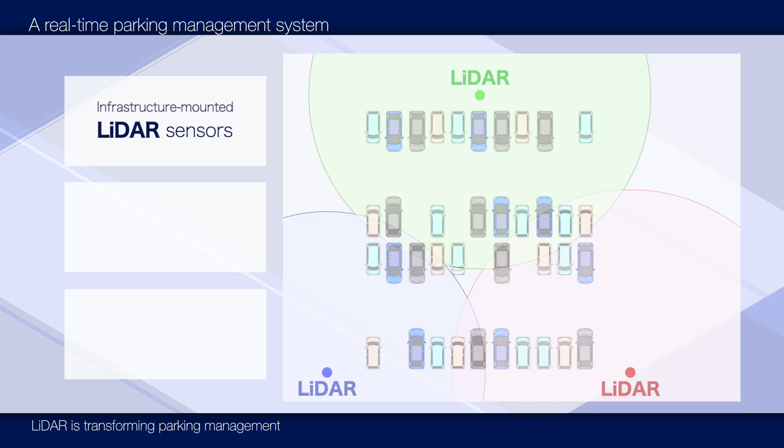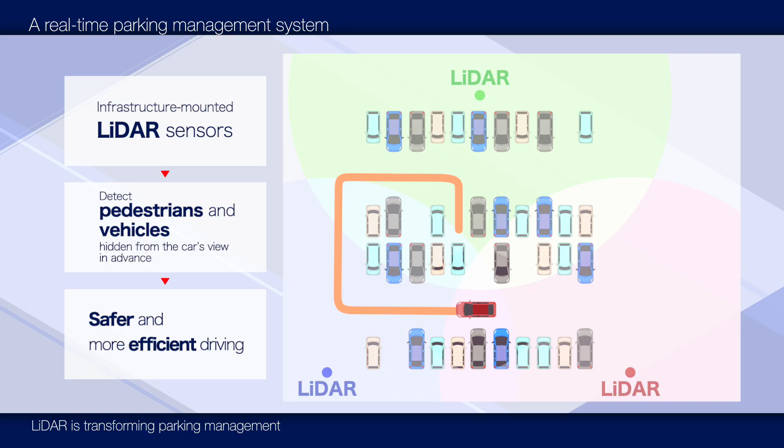In addition, we are also exploring applications for automated driving in parking lots, commonly referred to as automated valet parking. By using LiDAR sensors installed in the infrastructure, it becomes possible to detect the movements of pedestrians and vehicles, even in areas that are not visible from the vehicle itself, enabling safer and more efficient driving.

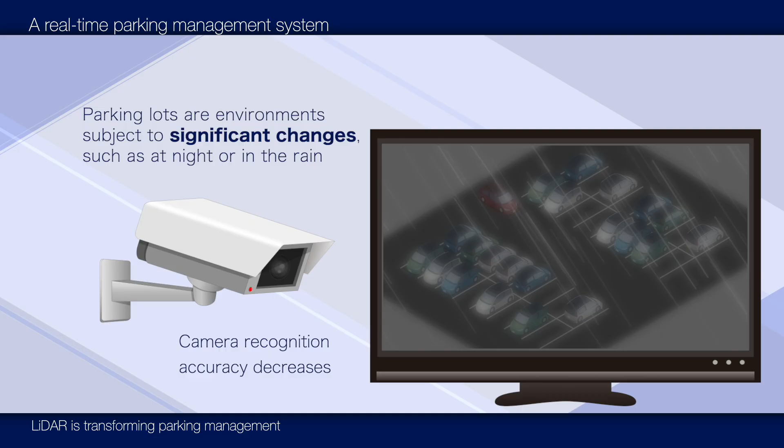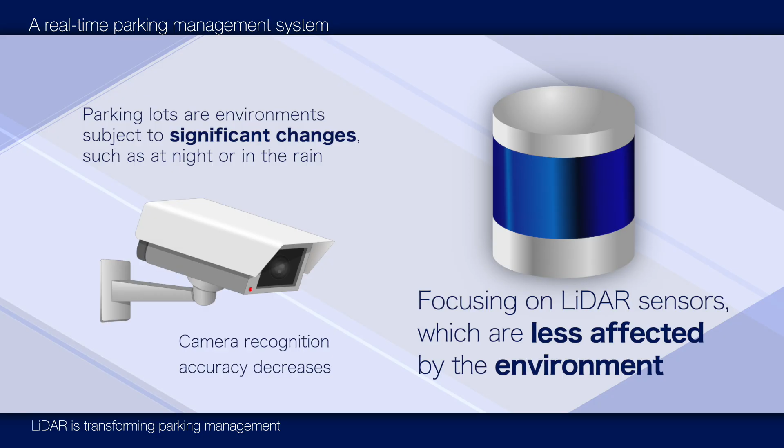Parking lots are environments that are subject to significant changes, such as nighttime conditions and rainy weather. When cameras are used to estimate parking space occupancy, recognition accuracy may degrade under such conditions. For this reason, we focused on LiDAR sensors, which are less affected by environmental changes.

LiDAR emits laser beams and determines the position of surrounding objects based on the reflected light. As a result, stable recognition performance can be maintained even at night.

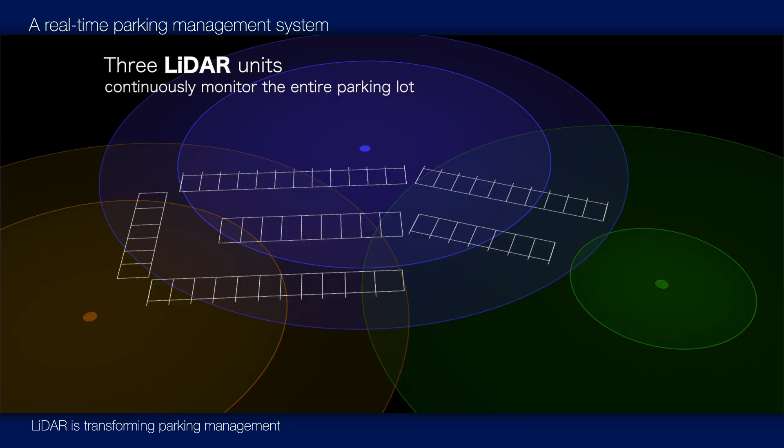At the public facility Grupo Fujito in Kasugai City, 3 LiDAR sensors have been installed to continuously monitor the entire parking lot. The data from these 3 sensors are integrated and utilized for services and experimental evaluations.

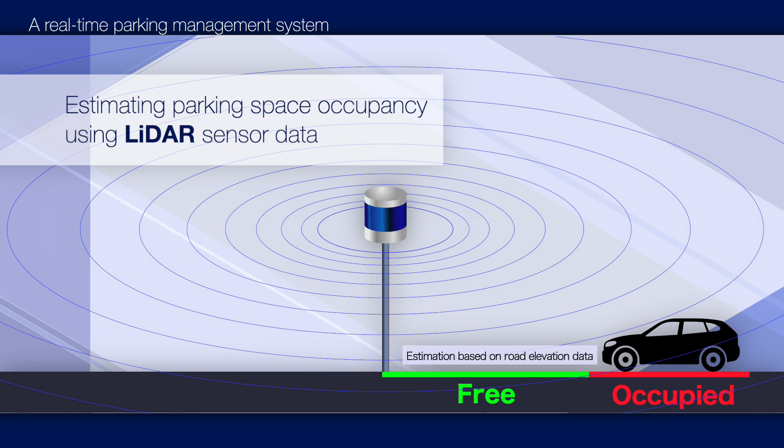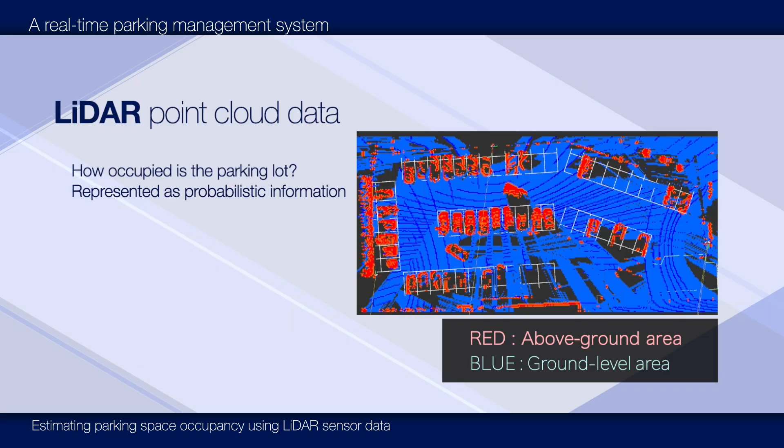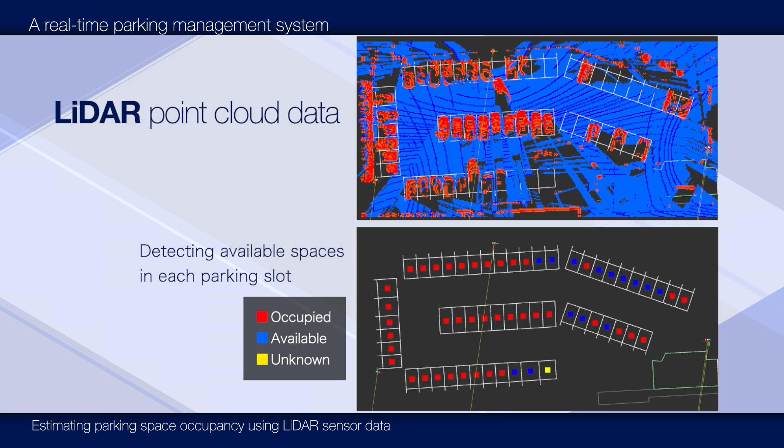First, we introduce a method for estimating the state of parking spaces using LiDAR sensor data. Based on point cloud data obtained from LiDAR, the degree of occupancy within each area of the parking lot is represented as probabilistic information. By combining this probabilistic spatial information with a high-definition map of the parking lot, it is determined whether there is sufficient free space for a vehicle to park. Each parking space is then estimated to be either available or occupied.

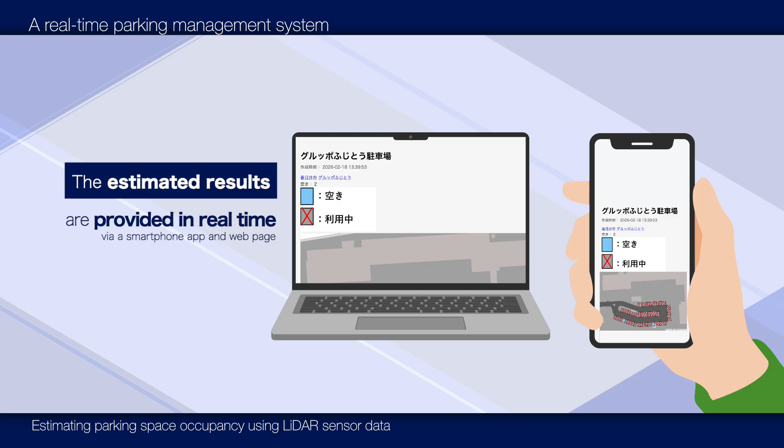The estimation results are provided to users in real time via a smartphone application and a web page. This allows facility users to check parking availability in advance, thereby improving overall convenience.

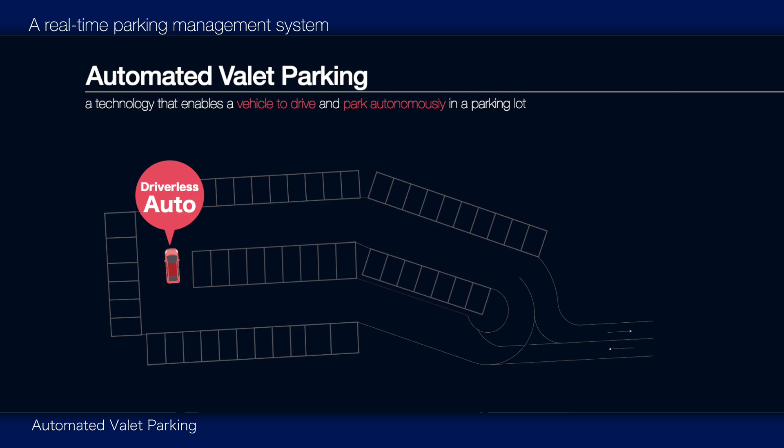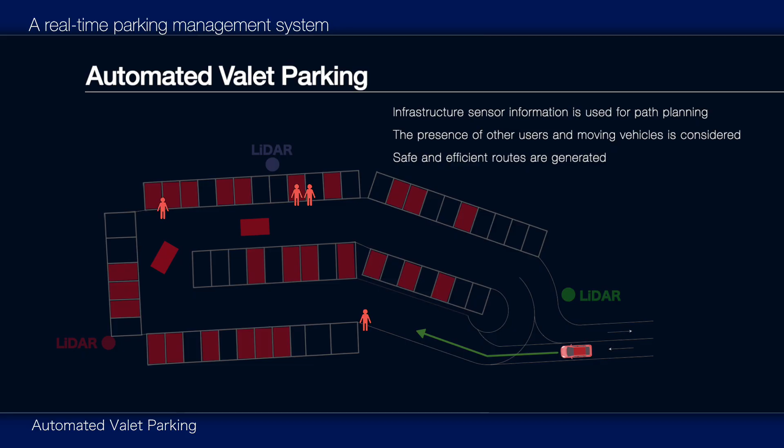Next, we introduce an application of the same LiDAR sensor data to automated valet parking. Automated valet parking is a technology in which a vehicle autonomously drives and parks within a parking lot on behalf of the user. By incorporating infrastructure-based sensor information into the path planning process, safe and efficient driving paths can be generated while taking into account the presence of other users and moving vehicles.

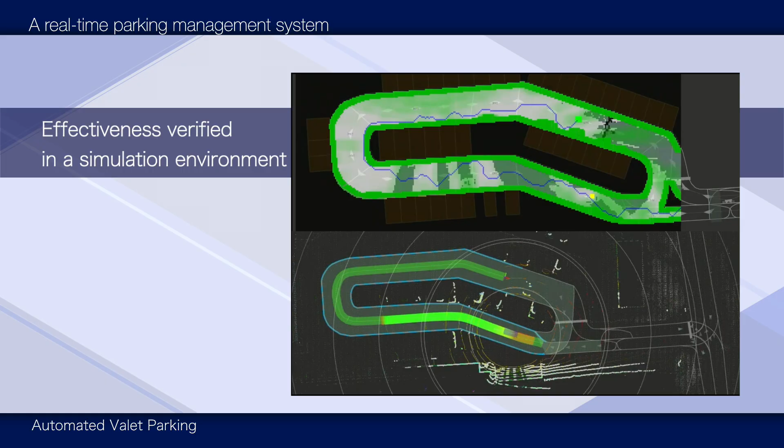First, we evaluated the effectiveness of the proposed method in a simulation environment. Furthermore, demonstration experiments were conducted in an actual parking lot environment. By utilizing sensor information from the infrastructure, it becomes possible to achieve both safety and efficiency, even in situations that are difficult for an individual vehicle to perceive on its own.